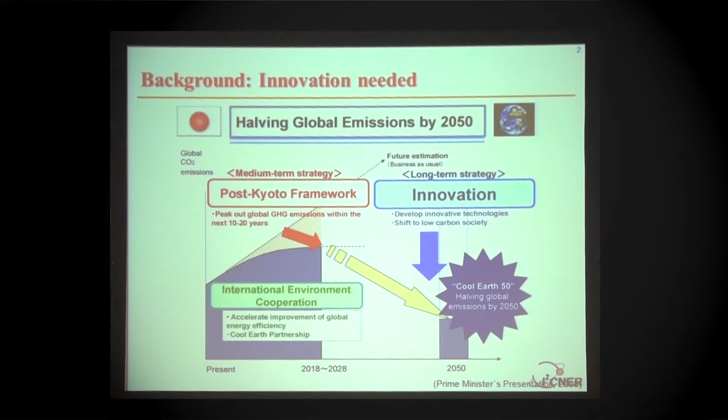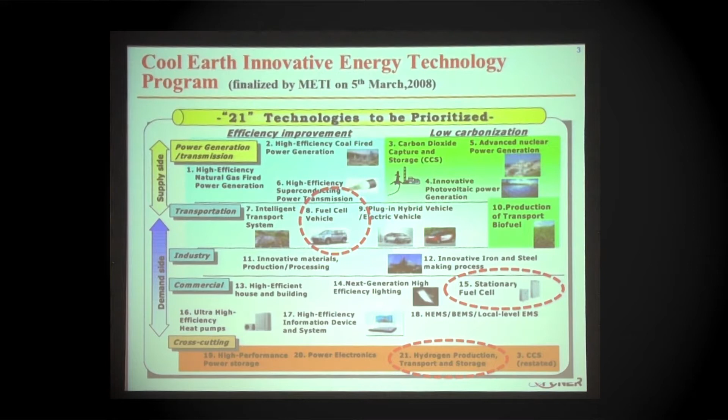Japan is taking leadership to reduce CO2 emissions, which is also an important topic and research issue in I²CNER activities. We especially need advanced energy technologies to reduce CO2 emissions. In addition, due to our serious energy problems, we should also increase energy efficiency, and the fuel cell is one of the key technologies that can contribute to this important issue. The Japanese government has already realized that advanced energy-related technologies are so important, and for more than 20 years has provided good support for their development. There exist almost 21 energy-related technologies, and fuel cell vehicles are key technology in automotive applications, as well as applications in residential sectors. Stationary fuel cells are also very important technologies, and you can see that cutting-edge energy technologies like hydrogen-related systems are very promising for the future.

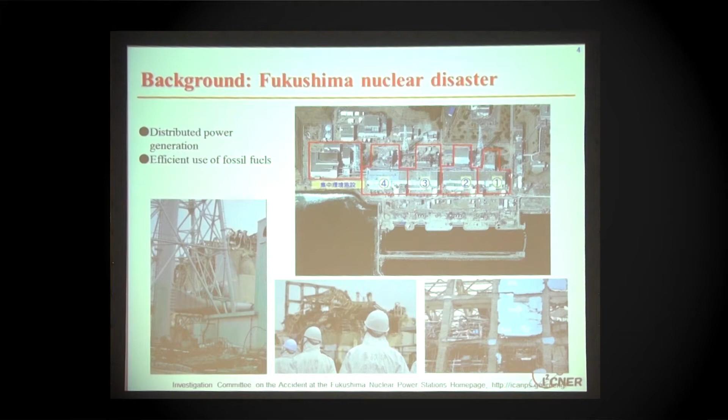After the Fukushima disaster, the importance of these energy technologies became more and more significant, especially since we have only 2 nuclear power plants operating. So at least for the next few years, or maybe longer, we must also manage electricity supply using fossil fuel-based technologies.

We have other promising technologies in fuel cells, and I want to briefly mention what could be available. As Hirose-san mentioned, for automotive applications the polymer electrolyte fuel cell is very promising, using a proton conducting membrane. For residential applications, but also for large-scale power generation, high temperature fuel cells or solid oxide fuel cells are very promising. There also exist other types of fuel cells, including molten carbonate and phosphoric acid fuel cells, and for special applications like space applications, alkaline fuel cells are very important technologies.

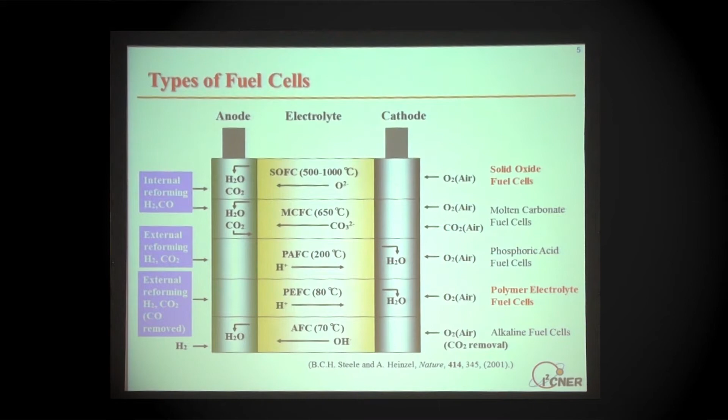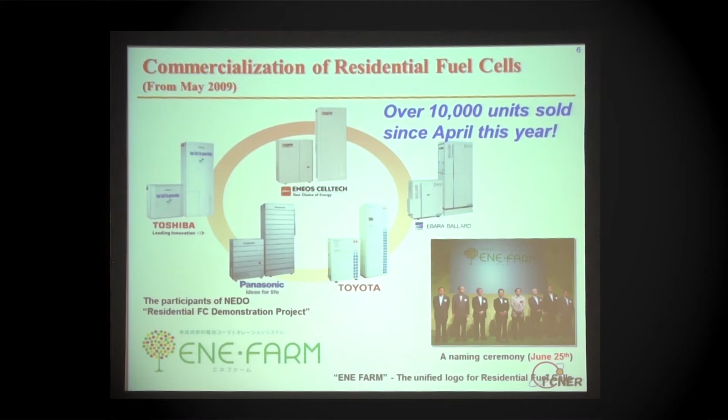We are very happy to work in such an environment in this country, because true commercialization of fuel cells has already started, and compared to other countries, it is very exciting to work in this environment. Commercial residential fuel cells based on the polymer electrolyte fuel cell have already been commercialized in Japan since 2009, and we are very happy that people have more and more interest in installing this fuel cell technology at their houses. More than 10,000 units have already been sold since April this year. Usually the electric efficiency of such systems approaches 40%, and including heat and electricity, the combined efficiency approaches 90%. That means we use almost 90% of the initial chemical energy for either electricity or heat demand.

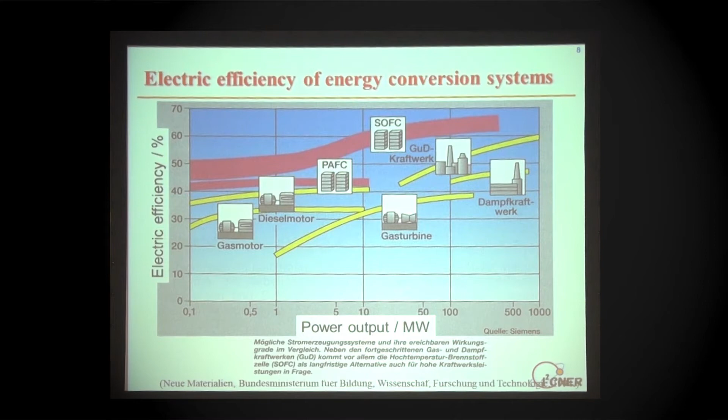Actually, we can combine the solid oxide fuel cell with the gas turbine and the steam turbine so that we can prepare the so-called triple combined system, which can theoretically approach an electric efficiency of more than 70%. This is very challenging technology, and I think that could be the ultimate power generation technology.

As a material scientist, of course, there are also many interesting issues related to fuel cells. Even though Mr. Hirose showed that they have very advanced technologies, there are still many issues, and we should also understand the durability, which determines the lifetime of the fuel cells. Besides the durability issue, we should also increase, for example, the electric efficiency, or use materials which can realize cost reduction in the fuel cell systems.

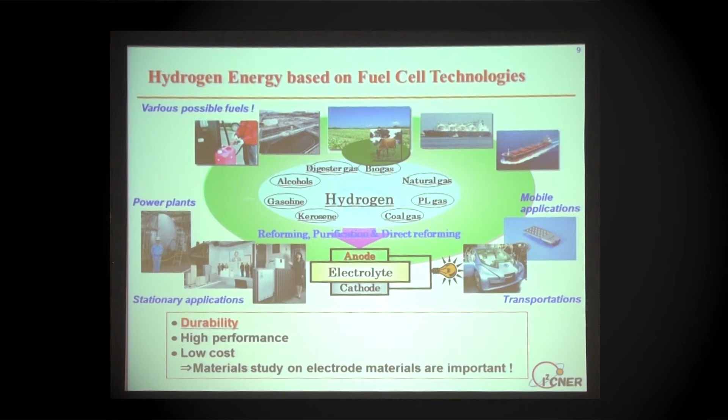And especially the electrochemical reaction is taking place at the electrodes, so we have also focused on the electrode materials, and also the interface between the electrolyte and the electrode.

I just want to mention, as a case study, what we have done in recent years. I should also mention first the high temperature fuel cell research. High temperature fuel cell, as I have mentioned, has just started commercialization, but they have clarified, or guaranteed, durability up to 5 years. But of course, for true commercialization, we should also ensure, for example, a lifetime of 10 years.

Otherwise, nobody can buy such a system. For several years, we have done systematic work on how to understand the degradation mechanism, or better to say, how the lifetime is determined. We may also clarify and categorize such degradation mechanisms in this way.

And what we have found is, for example, the interdiffusion phenomena, which is also very important. Especially some ions like calcium can easily diffuse through the grain boundaries, and even through the electrode into the electrolyte. And that can also cause sometimes a serious problem in the degradation.

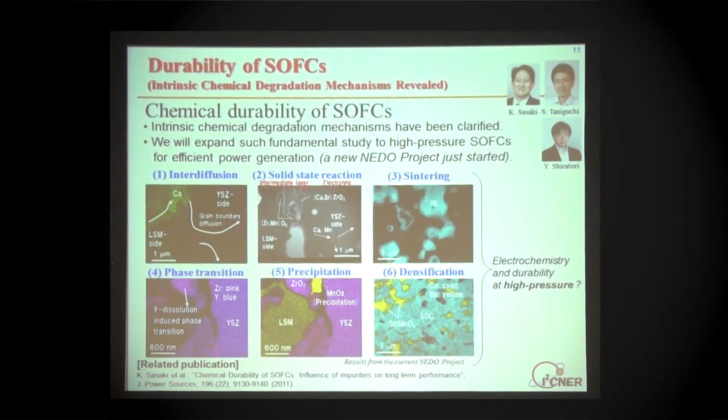We also found that the sintering of the catalyst material, in this case nickel, is also very important. We should also manage to keep the microstructure during high temperature operation over a long time period. We have also found that dopant in the electrolyte can also dissolve into the grain boundaries, and that can cause a problem, for example, during cycling, and that must also be prevented.

Of course, we have clarified such degradation mechanisms that determine the lifetime. But the challenging topic is, of course, the degradation issue at high pressure.

As I have mentioned, the combined cycle of solid oxide fuel cell, gas turbine, and steam turbine could be the ultimate energy technology. But actually, nobody knows how such a process can proceed at high pressure operation. This is a very challenging topic, but we now have a national project, and we want to understand the mechanism even on the atomic scale.

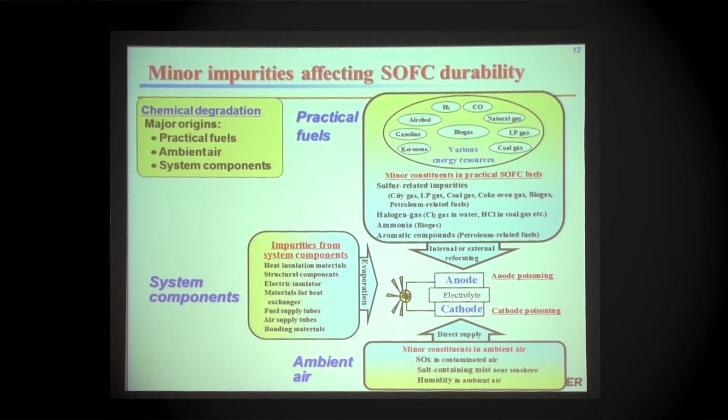Another issue, especially for carbon neutral fuel cells, is that we should also work with carbon neutral renewable energy resources, like biogas, besides hydrogen. In this case, we have many contaminant problems because impurities can come into the fuel cell from the fuel side, air side, and system components. We have clarified the mechanism associated with microstructure change. We now have advanced facilities so we may understand more details on the atomic and sub-nano scale in the future, and we hope to develop an actual fuel cell that could help build a carbon neutral energy society.

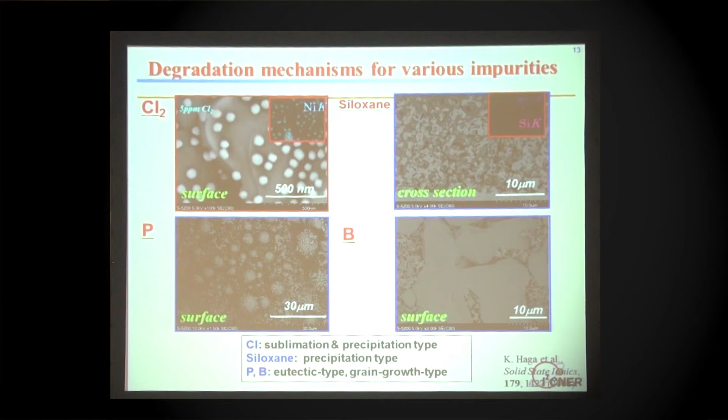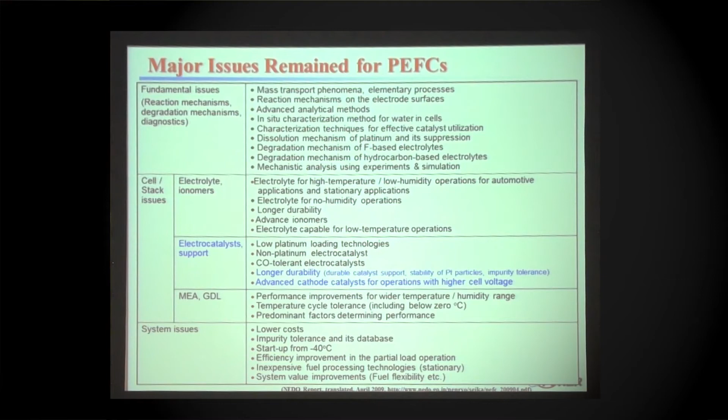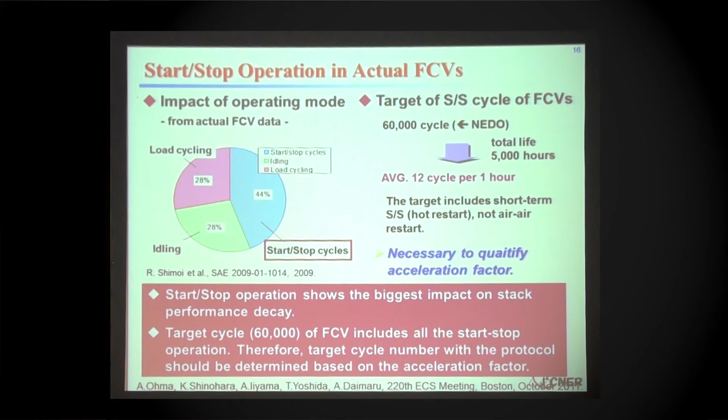Since several years ago, automotive companies have run many demonstration programs, and through this they learned what could be the decisive degradation mechanism showing the decline of fuel cell vehicle performance. This slide was presented by, I think, the Nissan group. They clearly showed that start-and-stop cycling causes almost half of the degradation of fuel cell vehicles. Therefore, NEDO set the target that 60,000 cycles up to higher voltage must be survived, corresponding to the lifetime of fuel cell vehicles. So we have started to work on the electrocatalyst issue, and we want to solve this problem.

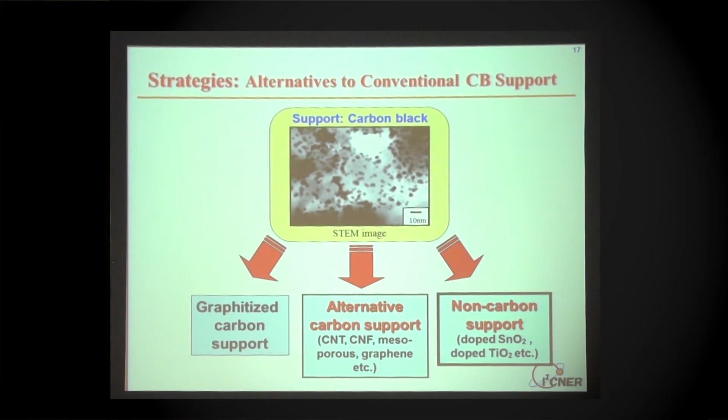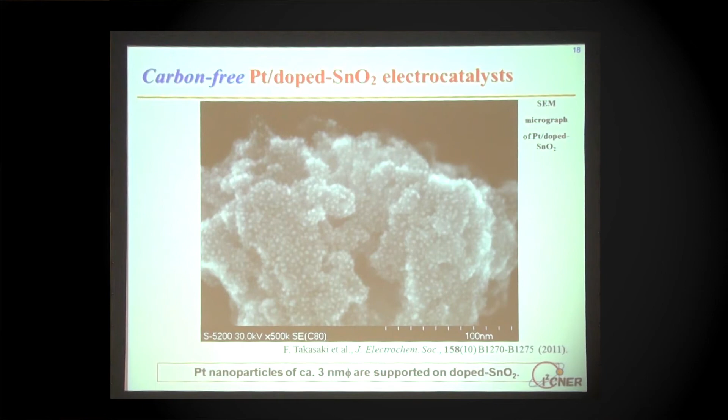At the university group, we are working on this because there exist other very interesting materials, for example alternative carbon materials. We have a good team where Hayase-sensei is working with nano mesoporous carbon, and Stephen, sitting there, is working with graphene—very challenging materials that may solve many problems. I am also personally working with non-carbon support, because if we develop an electrocatalyst without carbon, we are free from carbon corrosion problems. That was the approach we developed at the beginning of the I²CNER project. Now we have very small platinum particles, with a diameter of around 3 or 4 nanometers, but in this case we use absolutely no carbon. The material behind it is tin oxide, a non-carbon material which also has very good electronic conductivity.

Now at the beginning of the I²CNER, we have shown that this catalyst material is relatively stable, but at the beginning we have shown this durability using powder samples. Last year we have shown that we can also demonstrate the durability using the MEA. This is in progress, but the performance was not satisfactory.

But now we are very happy to announce that we presented new results last week, showing more stability. Even after 60,000 cycles, corresponding to the lifetime of fuel cell vehicles, we can retain the cell voltage at 85% of the initial value. This is a great improvement, and we also show comparable electrochemical performance compared to the state-of-the-art platinum carbon electrocatalyst.

Therefore, we have now shown that this material could be stable from the materials viewpoint, and also stable in the MEA, that is the actual fuel cell, showing not only durability but also comparable performance.

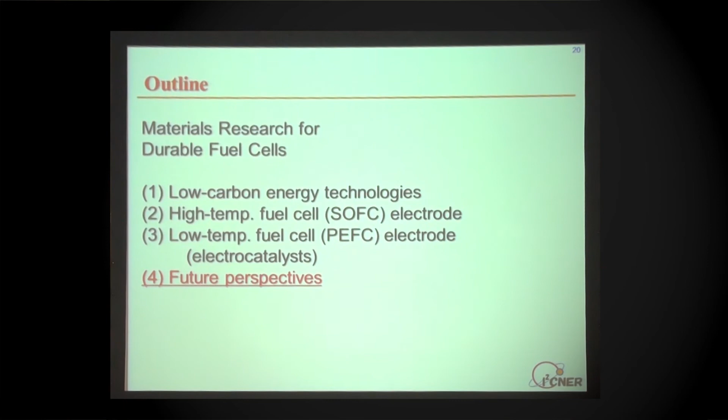I want to mention what we are planning, because we are still in the preparative initial stage of this I²CNER project. I want to inform you how we have prepared, especially for fuel cell research in the future. There exist many fundamental issues.

Already not yet clarified. For example, from the understanding viewpoint, we are working with polycrystalline materials, meaning we have devices with many interfaces. Of course, the electrolyte-electrode interface is key, but the grain boundary is also key, often determining the physical properties. Therefore, we want to understand what is going on at the interface.

The other issue is that we now have advanced facilities, so we may understand more at the atomic scale, or the molecular level, and also sub-nanometer scale characterization. It's also helpful to understand the microscopic mechanisms.

There also exists tough discussion going on, for example, about the nanosize effect, because if you have particles so small, the material is almost full of interface. That could be an interesting topic because the interface then dominates the material's properties.

In the materials issue, there exist, I think, three challenging issues, including the low temperature solid oxide fuel cell and high temperature polymer electrolyte fuel cell. This is also helpful, for example, for automotive application.

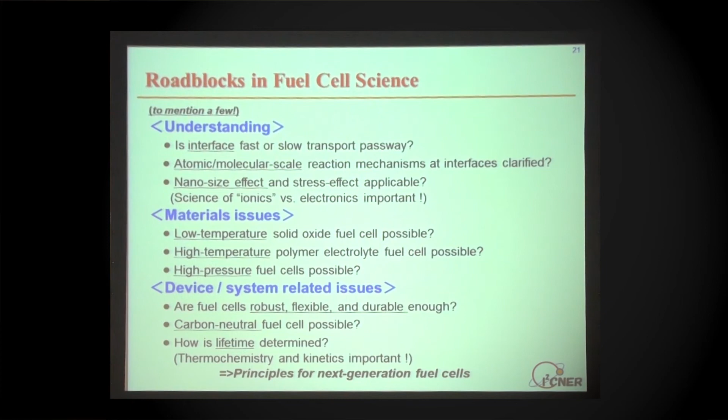Carbon neutrality is, of course, a very important topic, and we should also understand how the lifetime is determined.

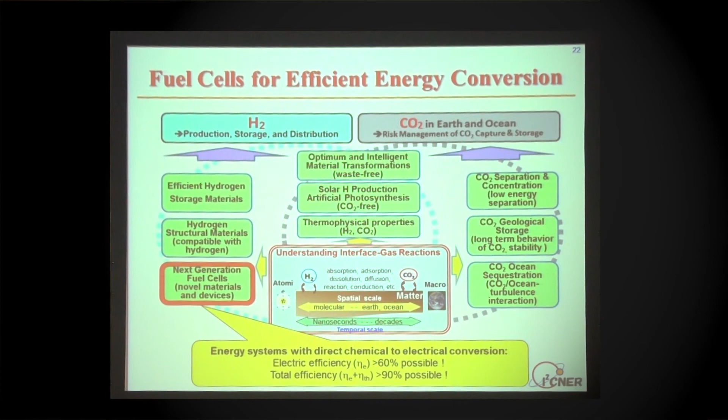I²CNER gives a good framework for fundamental research, because there are also many other research groups working to understand interfacial properties. Especially, we should contribute from the basic science viewpoint to other topics, because the fuel cell deals with many interfaces. And of course, without the fuel cell, we cannot realize a carbon neutral hydrogen-based energy society.

Thanks to the WPI program, we have already established a truly international team. We are very happy that we have good colleagues, and Dr. Bishop is also working to accelerate collaboration between MIT and Kyushu University. Professor Gewirth is a famous person in electrocatalysis at the University of Illinois, and we have good collaboration there. We also have good collaboration with Imperial College London, and Professor Gauckler is also strongly involved.

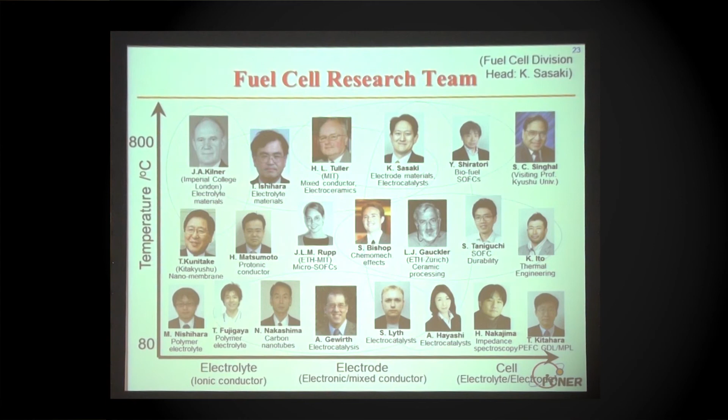We are also very happy that Dr. Singhal, a very famous person in solid oxide fuel cells, is this year a visiting professor at Kyushu University, and he will give a special lecture next month.

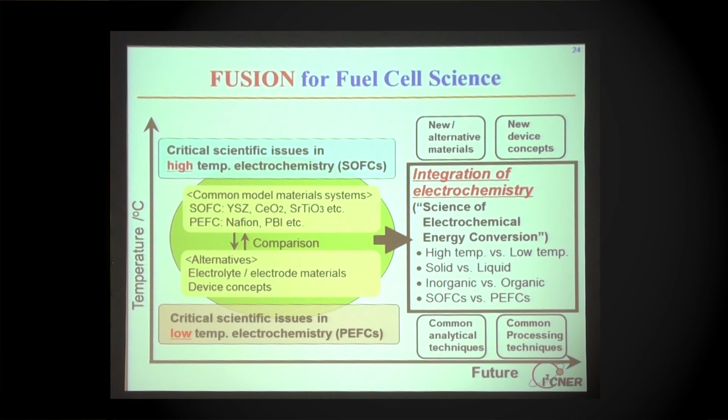In this project, fusion is very important. Even in the fuel cell field, people are talking with different languages. Someone working with low temperature fuel cells is working based on liquid phase electrochemistry, or classical electrochemistry. In the high temperature field, we are very often working with solid oxide physics or solid oxide chemistry background, and we want to integrate the electrochemistry. That could also be helpful to establish the fundamental science related to these energy conversion devices.

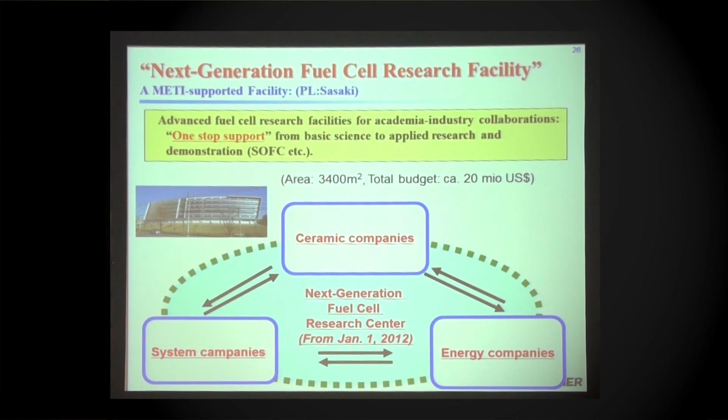On the first floor, we have the advanced facility. We will also get advanced facilities, and we are very happy that these instruments were also installed this month, including an atomic resolution scanning transmission electron microscope, so that we can make atomic scale characterization of the fuel cell.

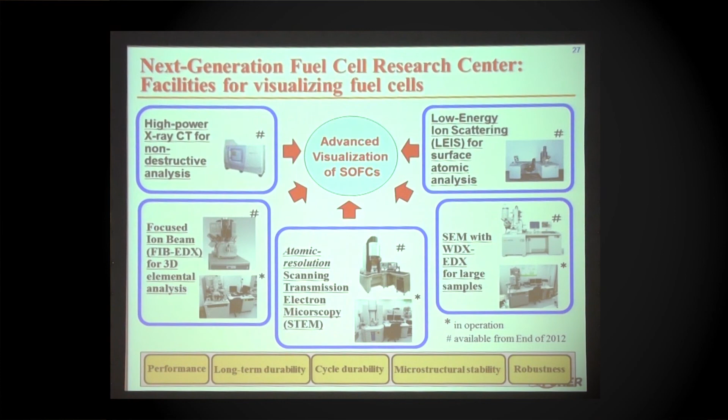We are very happy that low energy ion scattering, which is the only best apparatus in this field in the world, makes atomic scale surface analysis possible. We are very happy that, for example, non-destructive techniques must also be developed and established for future research.

I would like to mention that such collaboration also makes it possible that we have established a comprehensive research platform, so that basic science research can also be made within the I²CNER framework. We have facilities where we can make collaboration with private companies, and this understanding through such collaboration can also feed back into basic science. All these issues, from fundamentals to society, can be made under one roof.

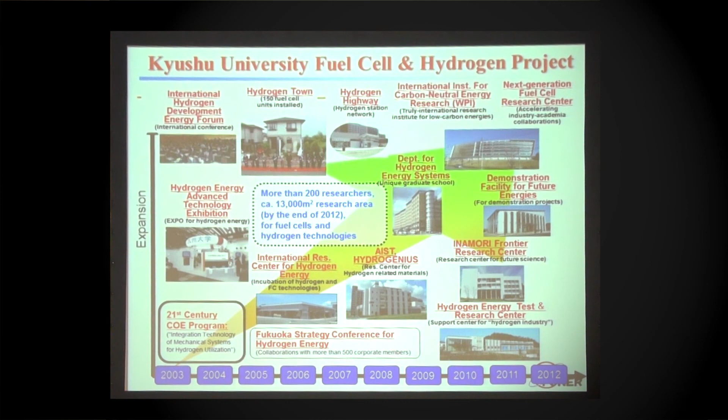That is what we have prepared for future research. Of course, at Kyushu University, we have also many facilities already established, and we are happy that we will be very strong in the hydrogen and fuel cell research area.

Before we close the presentation, I would like to mention again that fuel cells are not just one energy technology. This year is very important, because just 300 years ago, the steam engine was invented. What we have done since then is combust and burn fossil fuel so much, and that is the reason why we have many problems with Earth's environmental problem, but also energy problems. Based on the gasoline engine, the automotive industry has been established, but we are facing many problems, including energy and environmental problems.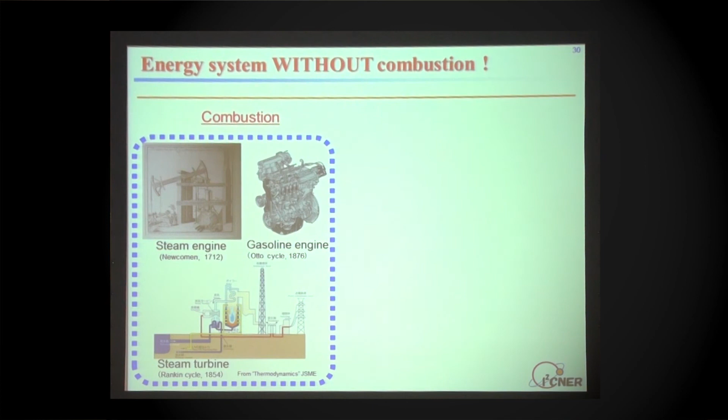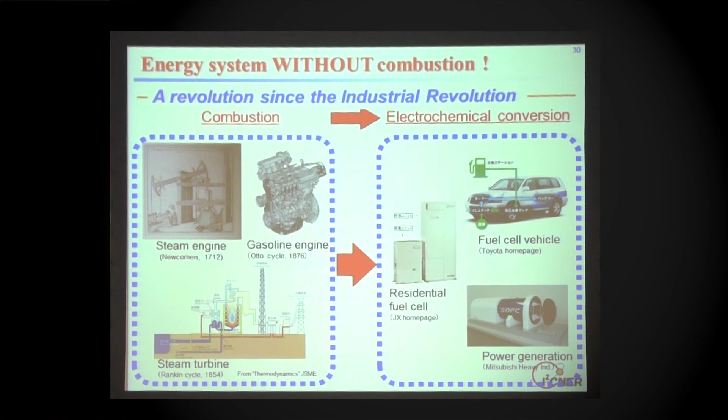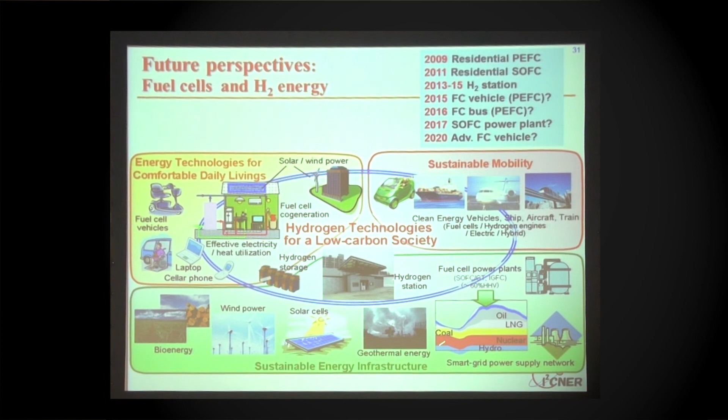Now, using fuel cells, which make electrochemical conversion possible, we can generate electricity at home, and fuel cell vehicles are helpful, as mentioned here, as well as in the power generation area. Fuel cells can also contribute in these ways. We hope that the I²CNER fuel cell group can also contribute so much to this revolution in the energy sector. We hope we can make a contribution to sustainable mobility, sustainable energy supply, and also comfortable daily living.

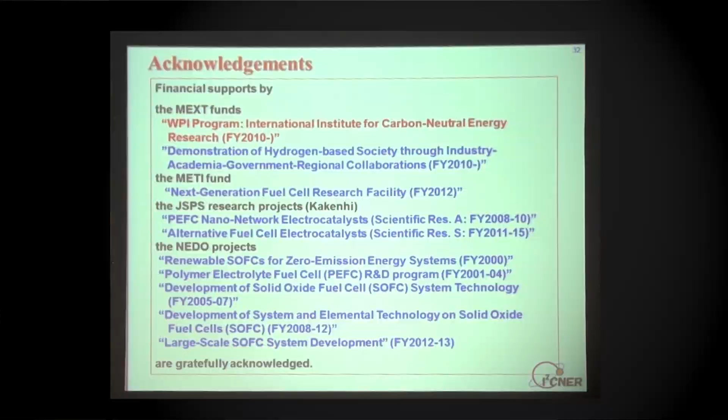Before I close the presentation, of course, for the WPI program we should also get a lot of external funding. That is also requested, so the professors must also try to get other external funding. I would like to thank, beside the WPI program, many other projects like Kakenhi and NEDO, so that we can continue making progress in the research. Thank you very much for your attention.